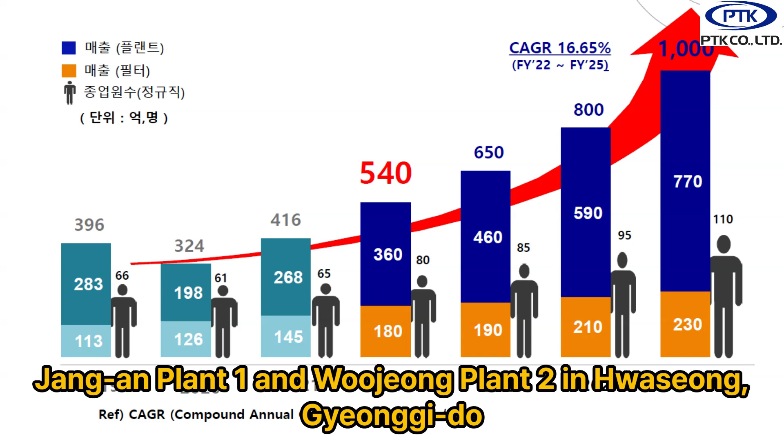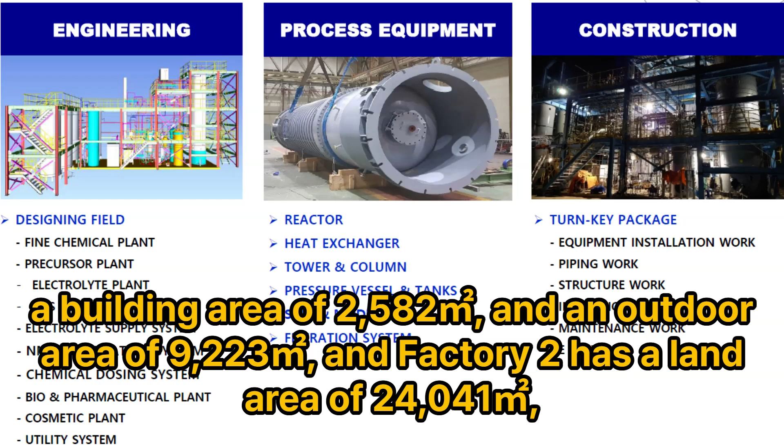Factory 1 has a land area of 11,805 square meters, a building area of 2,582 square meters, and an outdoor area of 9,223 square meters. Factory 2 has a land area of 24,041 square meters, a building area of 6,600 square meters, and an outdoor area of 17,441 square meters.

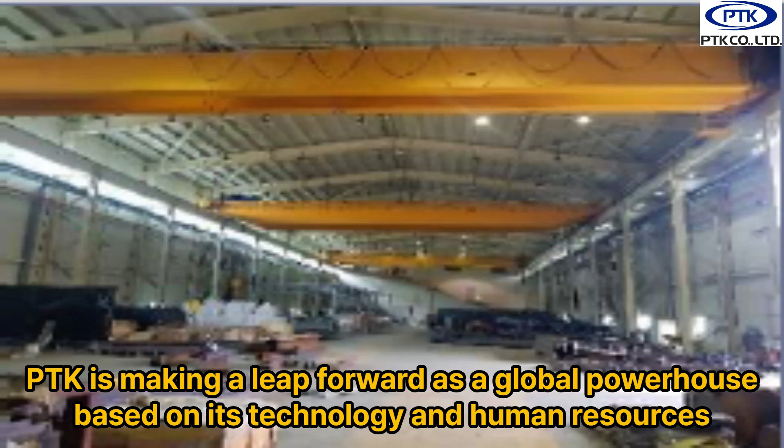Ptk is making a leap forward as a global powerhouse based on its technology and human resources. Ptk's core competitiveness is its specialized manufacturing of plant equipment.

We design and manufacture various industrial equipment such as reactors, heat exchangers, towers and columns, pressure vessels, and skid packages, and complete our customers' plants in the refining, petrochemical, fine chemical, renewable energy, and power generation industries.

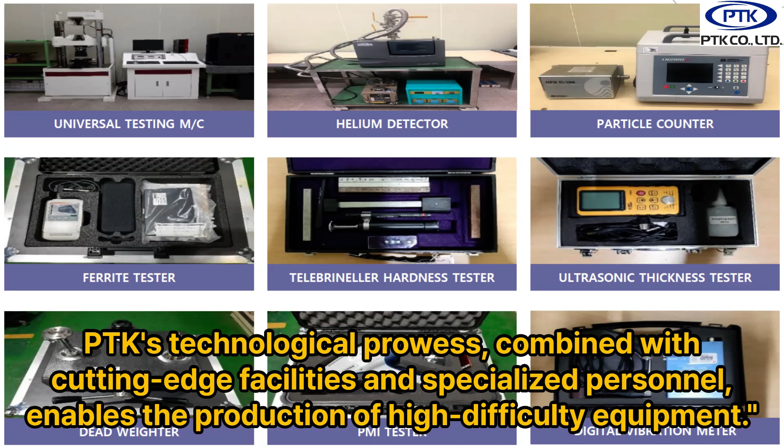Ptk's technological prowess, combined with cutting-edge facilities and specialized personnel, enables the production of high-difficulty equipment. First, the Jang-an Plant, capable of producing 2,500 tons per year, can manufacture large structures up to 100 millimeters thick, 25 meters long and 5 meters in diameter, and is equipped with a large 93-meter gantry crane and an RT room to provide a precise NDT environment.

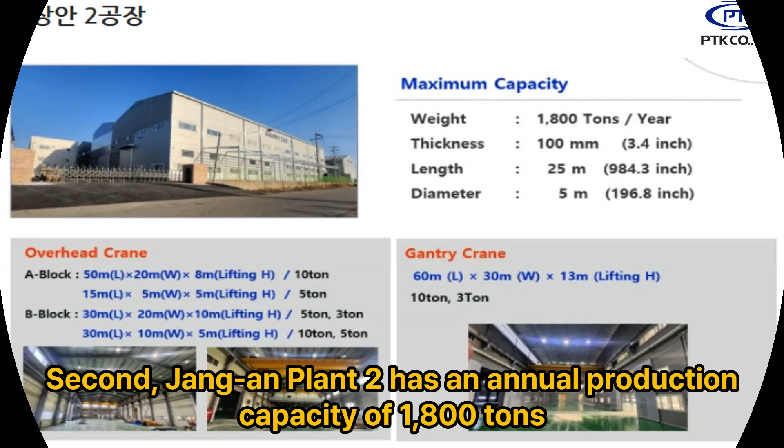Second, Jang-an Plant 2 has an annual production capacity of 1,800 tons and is optimized for the production of medium to large-sized equipment through overhead cranes of various tonnages and 60-meter gantry cranes.

Third, Jang-an Plant 3 has an annual production capacity of 1,500 tons and is responsible for precision manufacturing and post-processing through 3 types of overhead cranes, including a 20-ton crane and a 60-meter gantry crane.

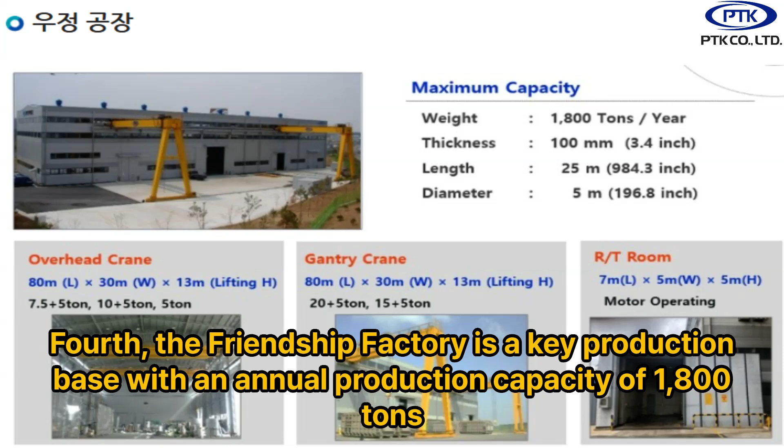Fourth, the Woojeong Factory is a key production base with an annual production capacity of 1,800 tons. It has 80-meter overhead and gantry cranes, enabling the production of ultra-large structures. It is also equipped with an NDT inspection environment, including an RT room.

Ptk places top priority on quality and safety. We have obtained ASME U2, ISO 9001, 14001, and 45001 certifications and are registered as a qualified supplier to 5 power generation public corporations, including Korea Hydro and Nuclear Power. We inspect the entire manufacturing process using precision testing equipment, providing plant equipment that customers can trust.

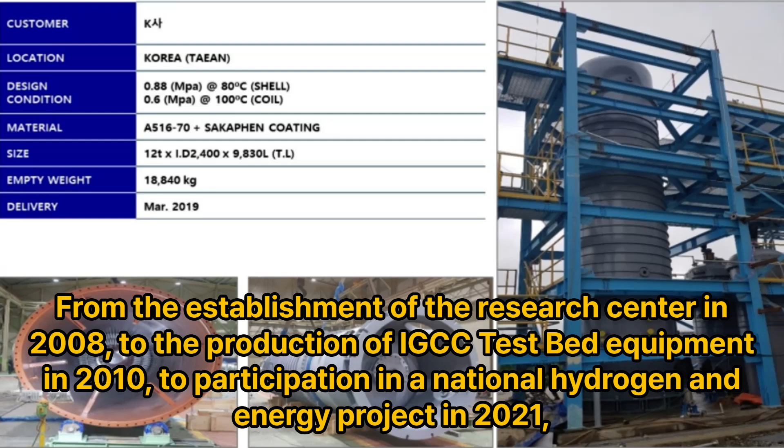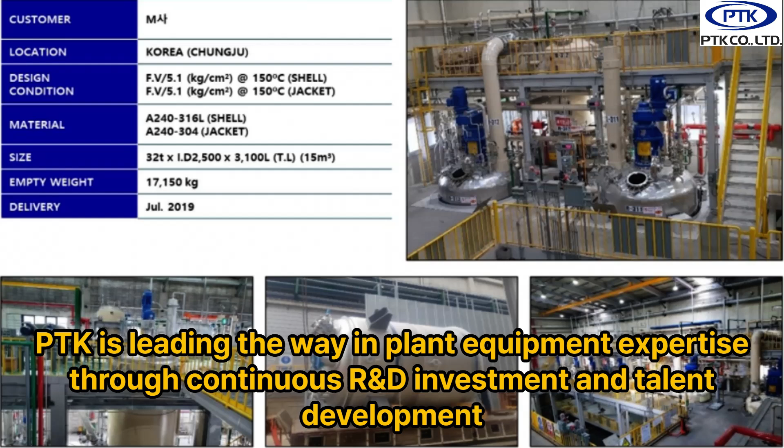From the establishment of the Research Center in 2008 to the production of IGCC testbed equipment in 2010, to participation in a national hydrogen and energy project in 2021, to the new operation of Jang-an Plant 2 in 2024, Ptk is leading the way in plant equipment expertise through continuous R&D investment and talent development.

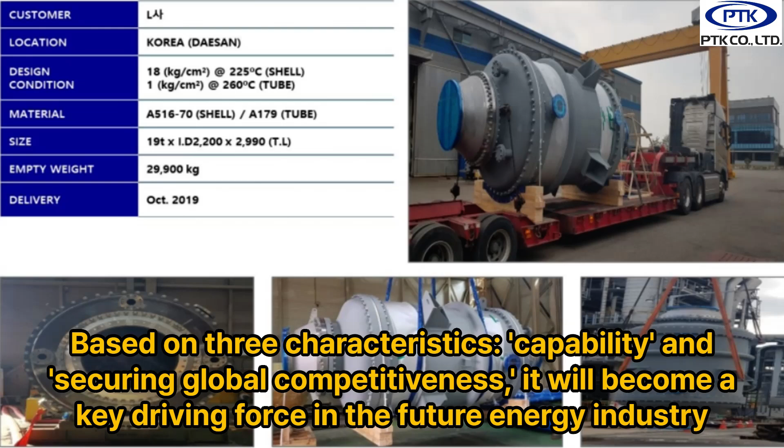Ptk is specialized in manufacturing core plant equipment and manufacturing and rolling large and heavy materials. Based on 3 characteristics, capability and securing global competitiveness, it will become a key driving force in the future energy industry. Ptk, a company that moves the world with technology and trust, create a new future for plant equipment specialists with Ptk.